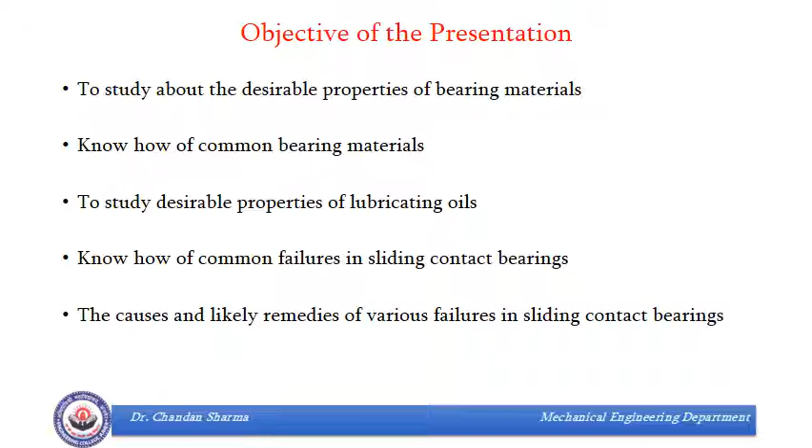To begin with, let's discuss first of all what are the desirable properties of a good bearing material. As we know that during operation there is chances that the temperature may become high. So a bearing material should have anti-stick property so that it should not weld to the journal surface when temperature becomes too high or when there is metal to metal contact.

Secondly, they are supposed to take large radial loads. So to support that, they should have high compressive strength, they should have high fatigue strength, they should possess one property which is known as conformability, which is the property to adapt to the shape of journal. Because if it is not there, then the distortion will take place. There is another property which is called as embeddability, which is the property to accommodate dirt particles likely to be present in the lubricating oil.

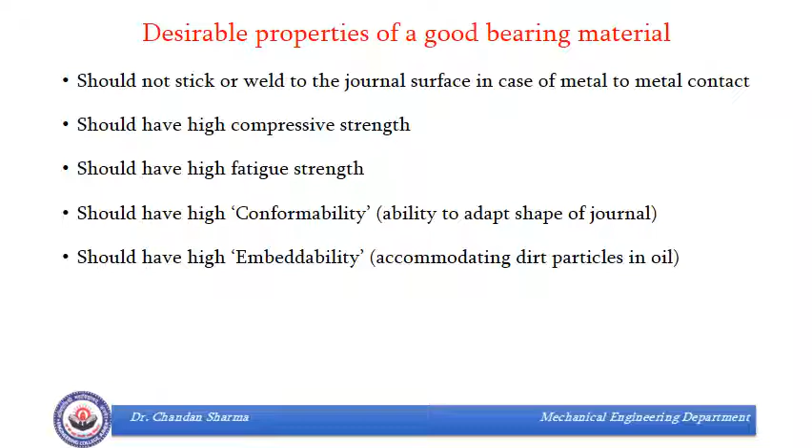The bearing material should have good bondability. What do we mean by this property? Most of the bearing materials we will discuss in the next slides. They come in the form of strips. They are stuck to the steel shell. So if the bearing material is having property of bondability, that means it will bond well with the high strength steel shell. Otherwise, it will wipe out.

It is possible that there may be some corrosive substances present in the lubricating oil. So our bearing material should have sufficient corrosion resistance. Our bearing is supposed to dissipate large amount of heat, so it should have high thermal conductivity and low thermal expansion. It should have very low friction coefficient so that heat generated is within limits, and obviously it should be of reasonable cost and easily available in the market. So these were a few properties that a bearing material should possess.

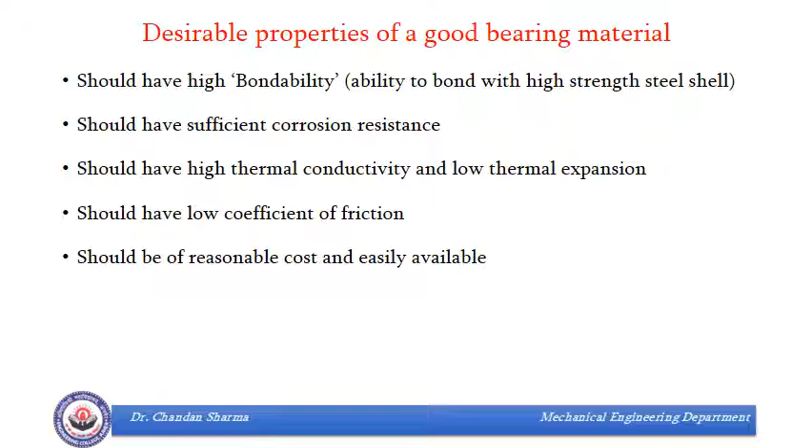Now let us discuss about bearing materials and the properties they are having. The most common bearing materials are called babbitts or white alloys. They are basically alloys of antimony and tin with few traces of copper. They are widely used as a bearing material. The pluses are they have excellent conformability and embeddability, the properties that we have discussed in previous slides. But the drawbacks are they tend to lose their strength quite rapidly at higher temperature, and they have relatively very low fatigue strength.

Second most preferred material after babbitts are bronzes. They have excellent casting and machining properties, but they tend to stick to the journal surface at high temperature. Then comes copper-lead alloys, which are more hard and having high fatigue strength, and they are used in heavy duty applications. I would like to point out over here that babbitts and copper-lead alloys are used as strips. 0.5 mm thick strips are available. They are bonded to the high strength steel shells and used as bearing material.

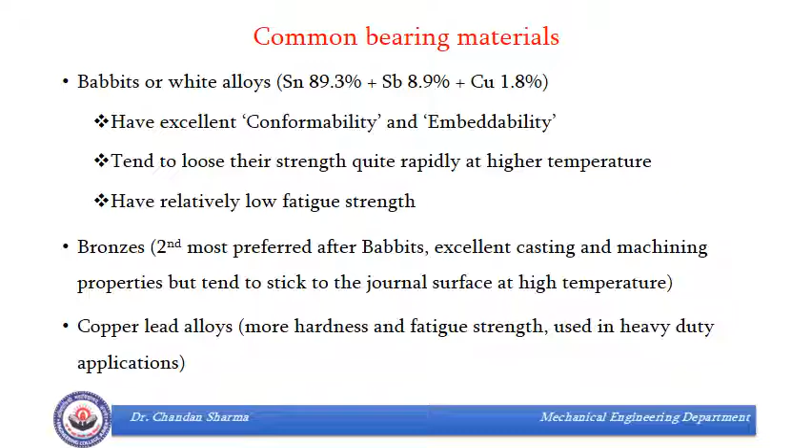Other materials that are commonly used as bearing material are aluminum alloys, silver, graphite for high temperature applications, Teflon, which is used when it is not possible to supply lubricant, because with Teflon no lubricant is required as its friction coefficient is very low, and rubber bearings are used in marine applications. So we have seen that plenty of materials are used as bearing materials. They are having few advantages and few disadvantages.

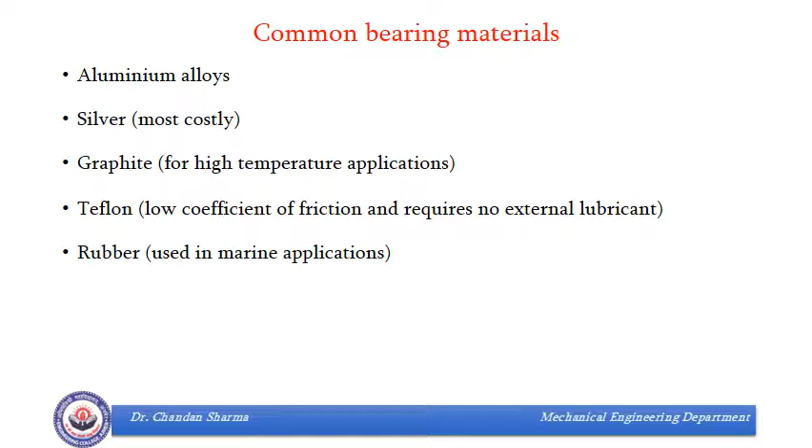Let us discuss the most common lubricant used in the bearing, which is oil, maybe vegetable oil or mineral oil. What properties a lubricating oil should possess?

First, it should be available in a wide range of viscosities. As we have seen in our previous class, we find the viscosity of lubricating oil using the Sommerfeld number, which will depend upon the RPM of the application and bearing pressure. So it is likely that the viscosity might come in a wide range. So a lubricating oil should have viscosity in a wide range.

It is always desirable that viscosity should not vary much with the temperature. It should be chemically stable. It should not react with the bearing material. It should have sufficient specific heat. Then only it will be able to dissipate the heat from the bearing surface, and it should be commercially available at reasonable cost.

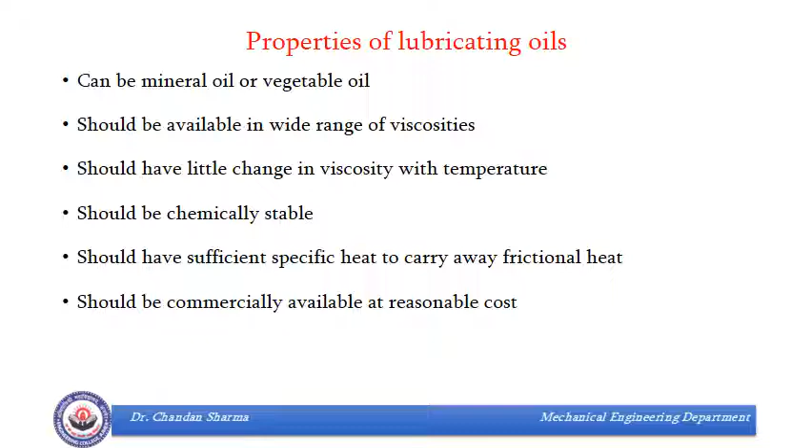Moving further, let's discuss common failures in sliding contact bearings. There are four types of failure commonly observed. They are abrasive failure, wiping of bearing surface, corrosive failure, and failure due to distortion. In the next slides, we'll see their causes and what are the possible remedies.

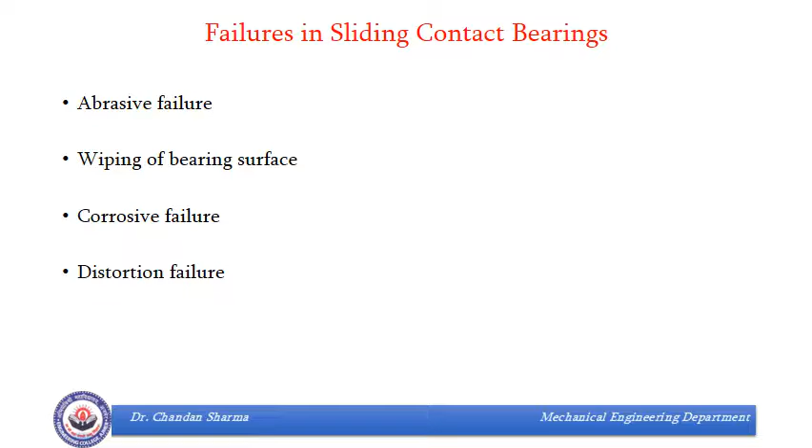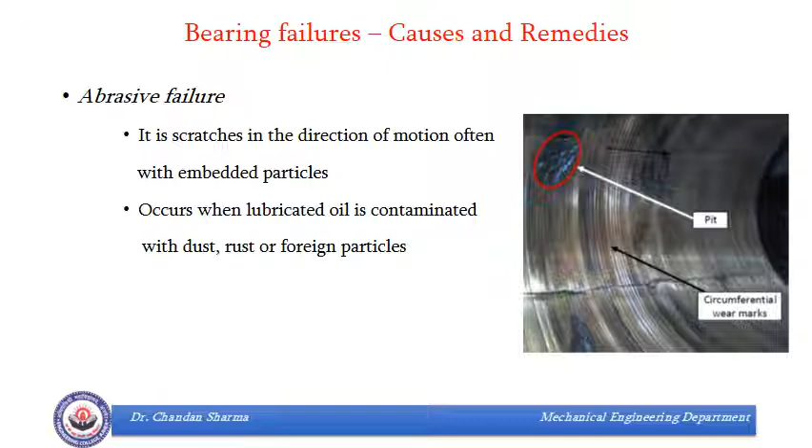The first failure which is observed is called abrasive failure. What happens whenever a particle is embedded between journal and bearing? If the bearing is too soft, it often puts some scratch marks on the bearing. You can see this over here. It occurs when there are foreign particles or rust particles present in the lubricating oil, or you can say when the lubricating oil is not clean. We can avoid this type of failure with proper enclosure, cleaning the housing of the bearing at regular intervals, using high viscosity oil, etc.

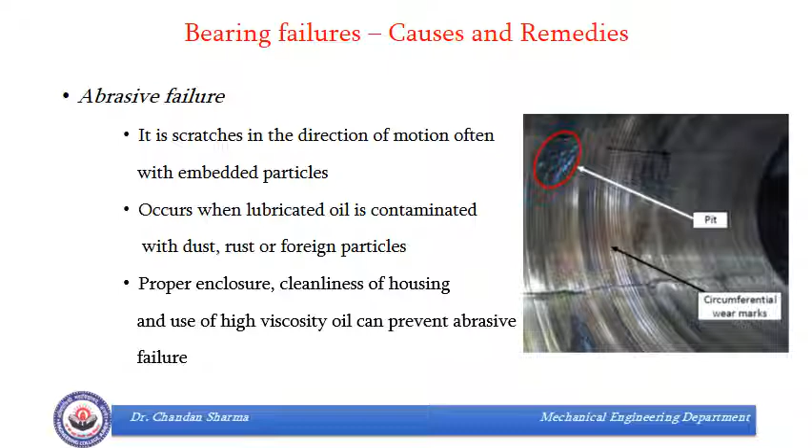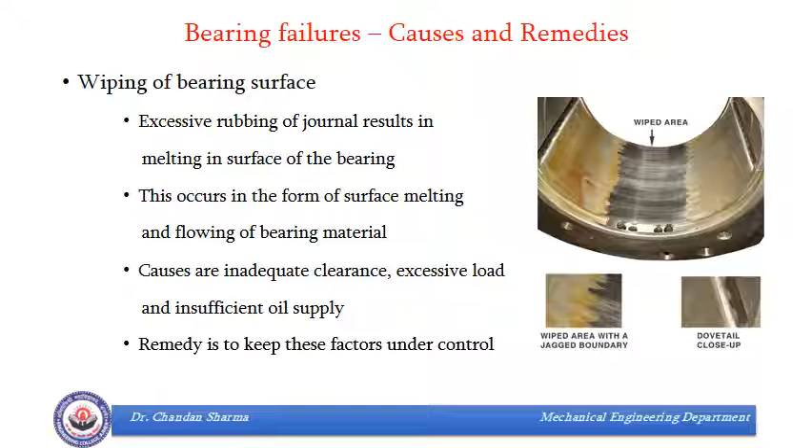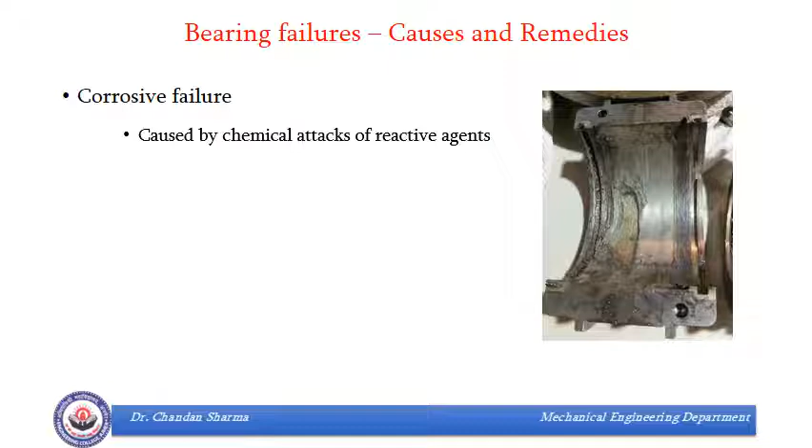The next failure is corrosive failure. You can see over here that corrosion has taken place on the bearing surface. It is caused by chemical attacks of reactive agents which are present in the lubricating oil. Oxidation products corrode materials such as lead, copper, cadmium and zinc. Causes are again inadequate clearance, excessive load and insufficient oil supply. If we keep these factors under control, we can avoid this type of failure.

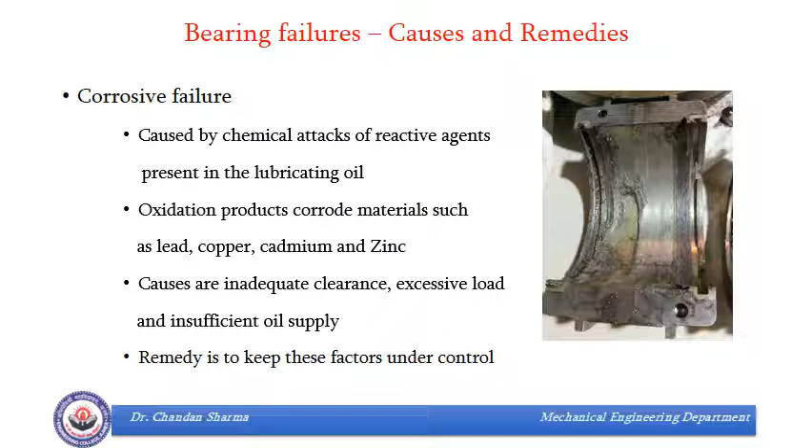So in this presentation and in the previous presentations, we have tried to cover various relevant aspects of sliding contact bearings. We started with the modes of lubrication, then we covered how viscosity and coefficient of friction have evolved and how various researchers have contributed. Then in the next lecture, we discussed the various design parameters that affect the selection of parameters for the bearing. And then in the next class, we discussed the detailed design procedure which is adopted for the selection of parameters of sliding contact bearings.